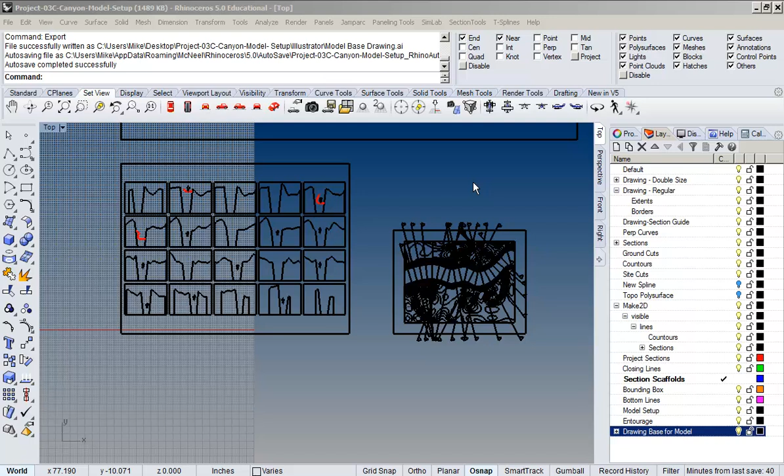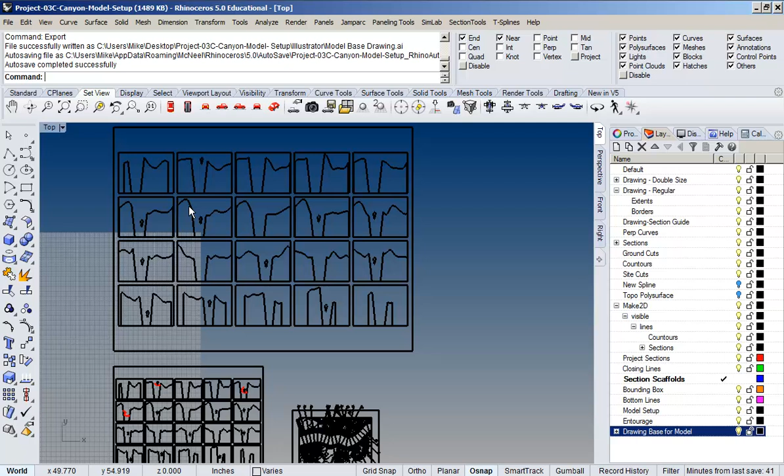It's more that we're trying to get set up to have these canyon slices ready, to have the base drawing ready, and to have what we're calling the section scaffolds ready, so we know where to put them and where to start building the model. The workflow itself is a lot of 2D information. We're not going to be going back into the 3D model as much as we are just going to set up for the model build. It's going to be a two-dimensional kind of workflow.

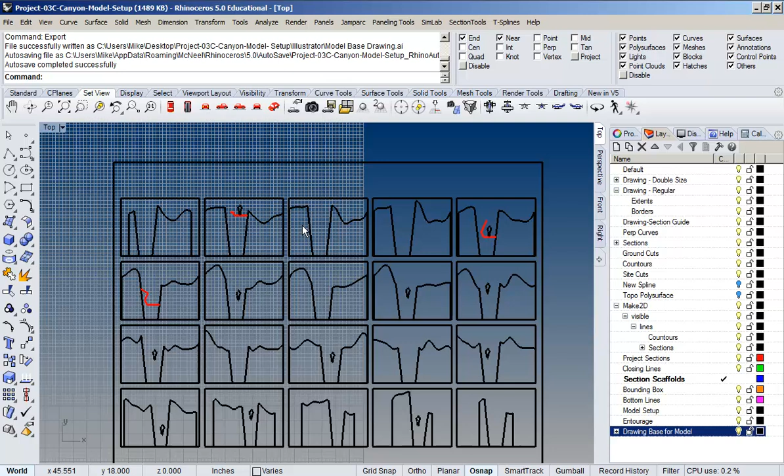Let's say that this is your drawing here, and I just did some mock-up with straight line polylines in terms of this is the thing that we have on the wall today, and that's the sections. I've only got 3 here, but let's say there's 11 of them all in here. What we want to do is scale these up to be the size of the full scale drawing that you guys had before.

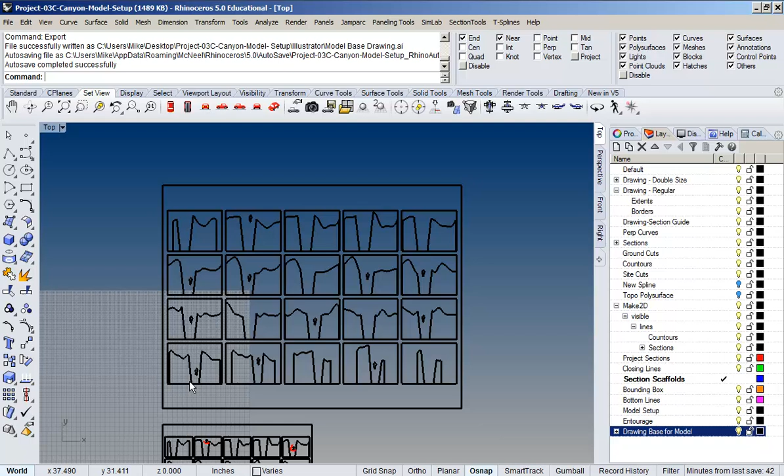So this is what we had, remember, back in project 2D, where we sliced up your model, and after slicing it up, we put it there, and then scaled it down to the 1/8 or smaller size, right? So we're going to take this and scale up our section. I think one of my guys moved over, but that's okay.

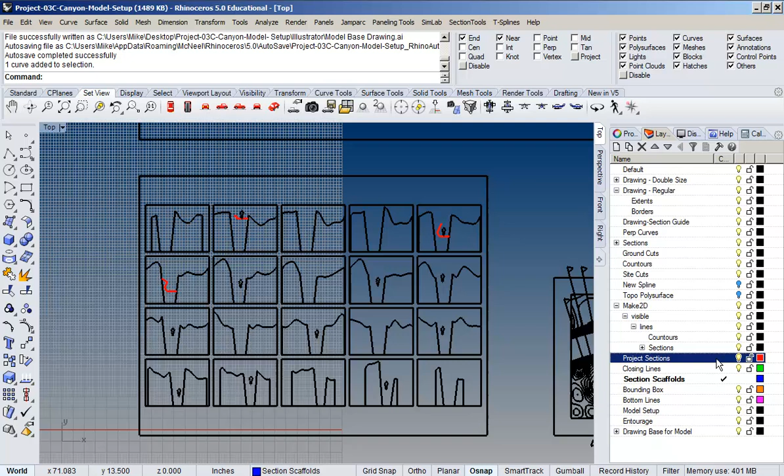I've got a layer that's just called sections, my project sections right there. So I'm going to select those and copy them.

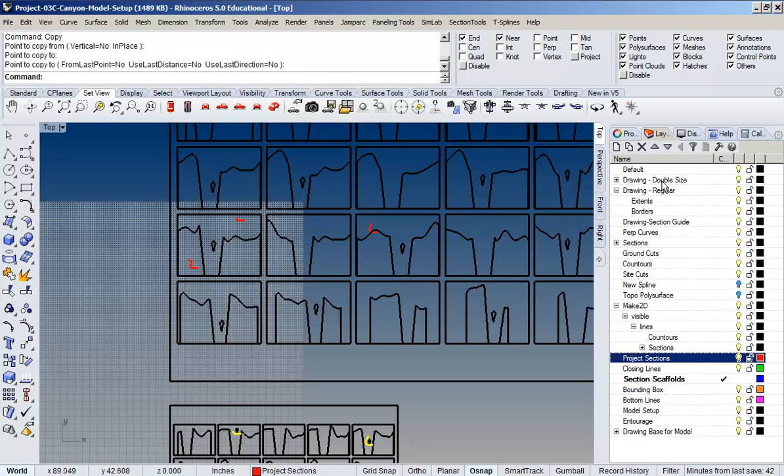You always want to use a consistent reference point. I think a good one's always the bottom left box that we've got here. And I'm going to copy them over to the double size thing. So you can see my layers here are from before, the drawing double size and the drawing regular size and stuff like that. I want to rescale these to fit into my bigger drawings.

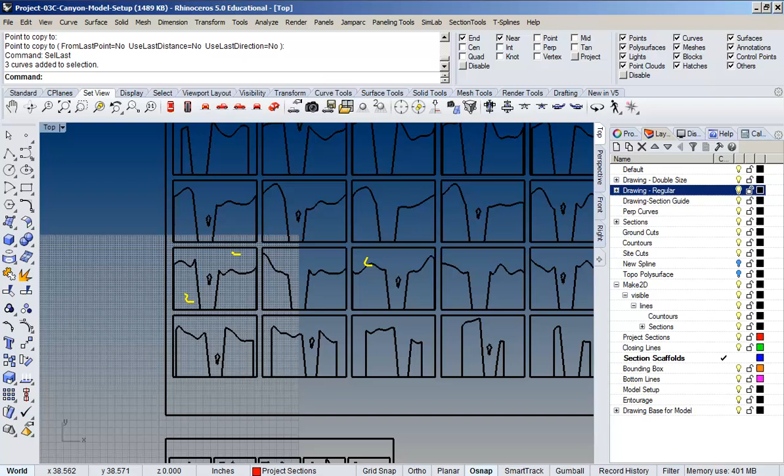So I'm going to do the select last command, which is SelLast, and that's going to pick those curves, and I'm going to scale them. My origin point is that same bottom left corner right there, and my scale factor is 2. That's just going to pop those up there.

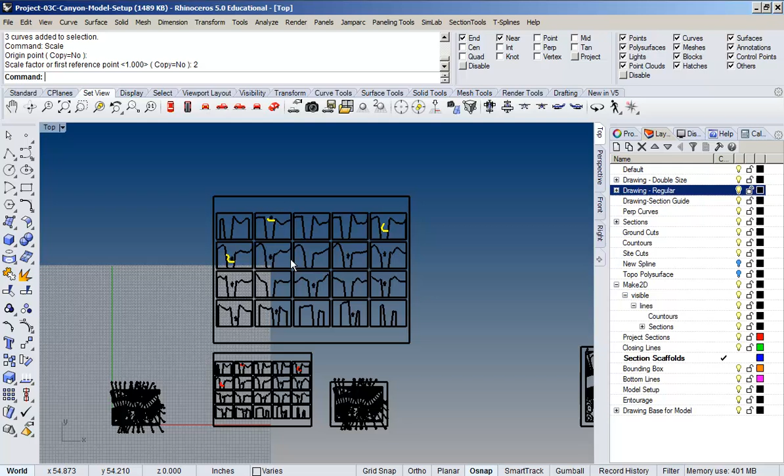The next thing that we're going to do, let me just make sure, is close up any holes that I've got. What I mean by that is we want to be able to treat this as our section scaffolds as one piece, and in order to do that, we want to come out of this with one closed line that we can use to set up.

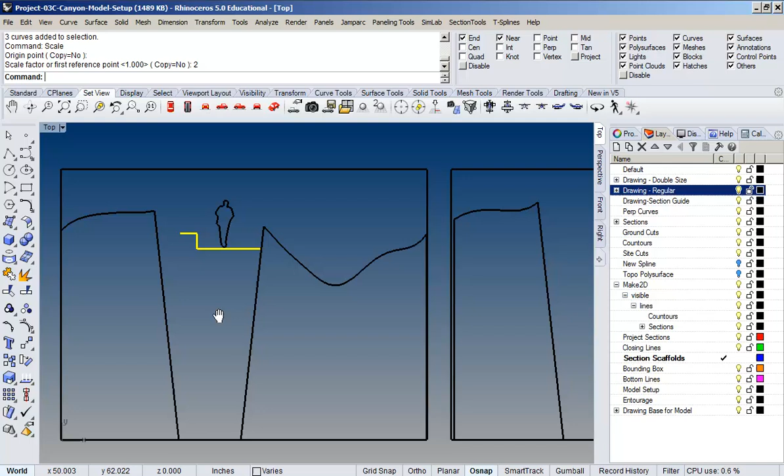So, for instance, on a project like this, I've got this cross section that's happening, and I want to be able to have a scaffold that fits to these 2 pieces of the canyon that I can line up to it. The best way to do that is to close it up.

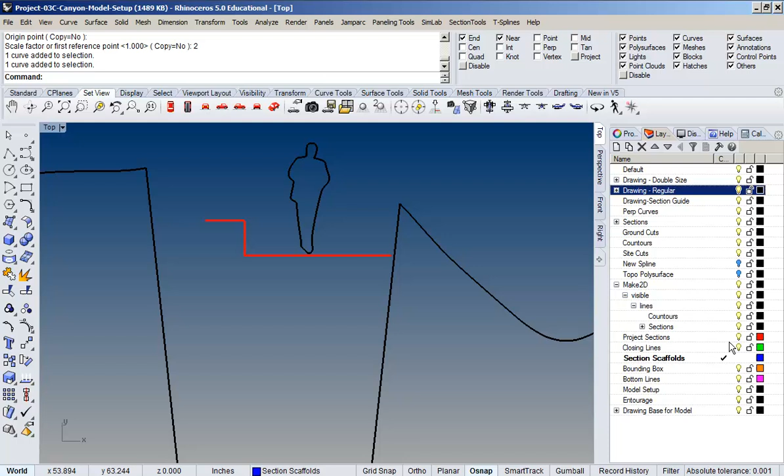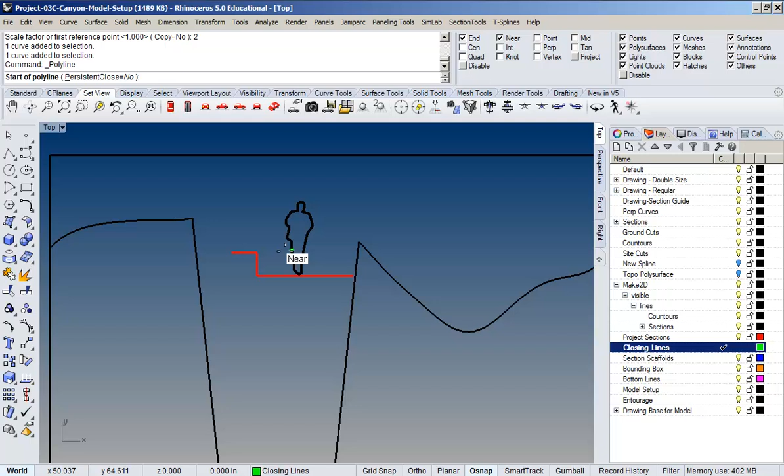So I've got a layer called closing lines, and this is going to be a matter of, for you, how do you want to work it, because we're trying to get as much access when we're model building from the top. Otherwise we would just cut the hole out of the middle of this thing. But if you're smart about it, you can give yourself a kind of setup to remind you what part of your model you want to work with.

So for instance, I've got 1, 2, 3, 4 points here in my model. If I want to be able to go down and work and connect to it, what I'm going to do is make my closing line come up a little bit and go over and come down like that.

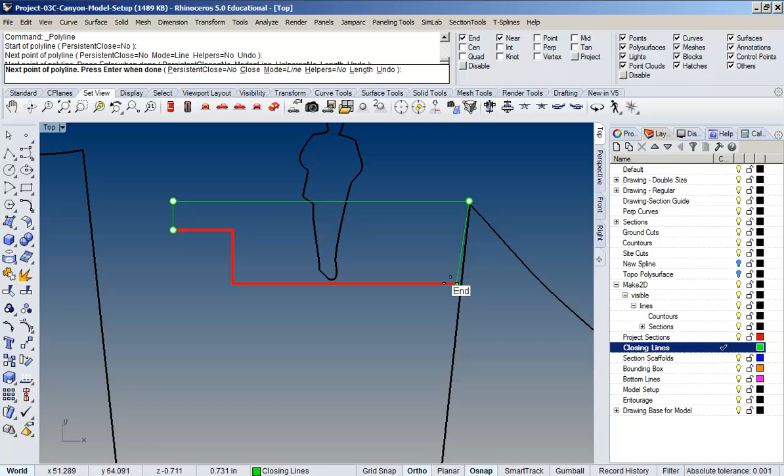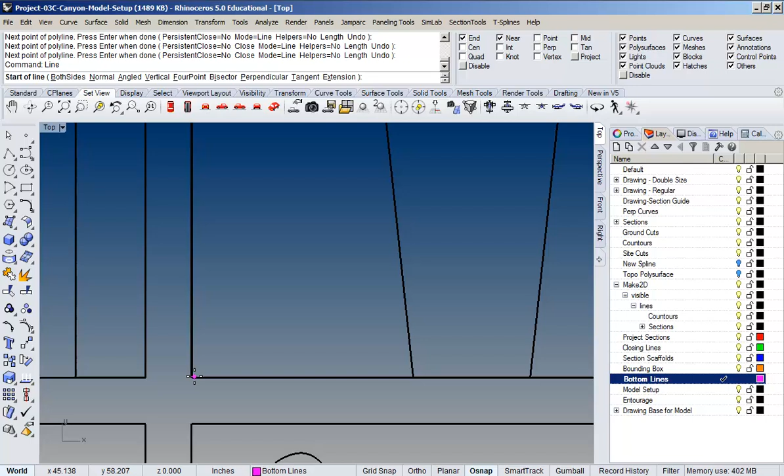Okay, and the next thing I'm going to do is I'm going to draw what's called a bottom line. We're calling it that, and that basically is reminding me in this particular moment how wide my canyon bottom is. What that's doing is it's letting me later on set this thing up to tack on to when it's glued straight up like this. It'll allow me to attach it right to it.

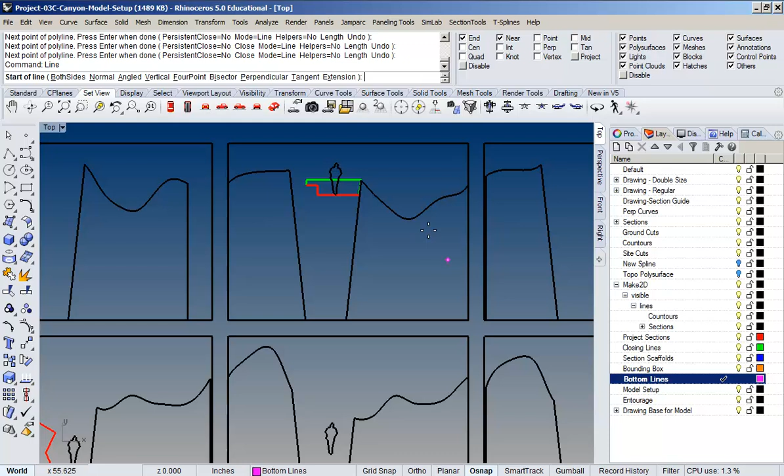I just want to let you know that it can be tricky right now with the way that my graphics look. It looks like they're in the same spot as my borders, and if you're not sure about that, you can take off your borders or something like that for a second and just make sure that you go to the ends here. So I'm going to draw one from here to there.

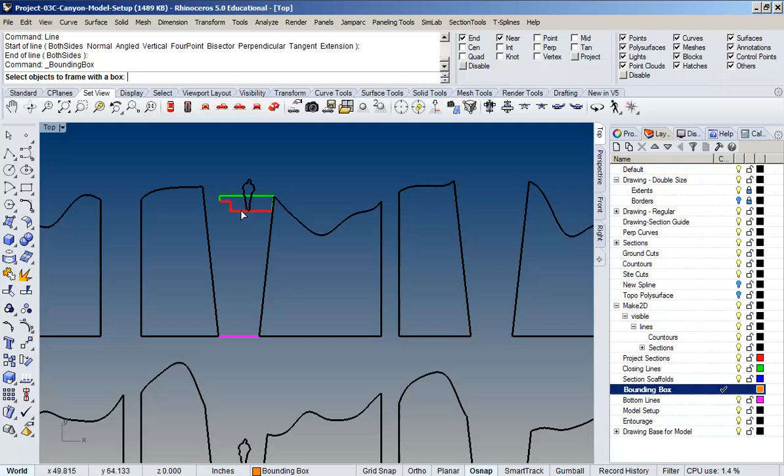And the reason why I'm doing that is it's going to set up a bounding box. This bounding box is going to go up as high as I need and as wide as I need. So that command is under Analyze, Bounding Box. It wants to know what objects we're going to frame with the box, and it's going to be my cross section, my closing curve, and my bottom curve, like that.

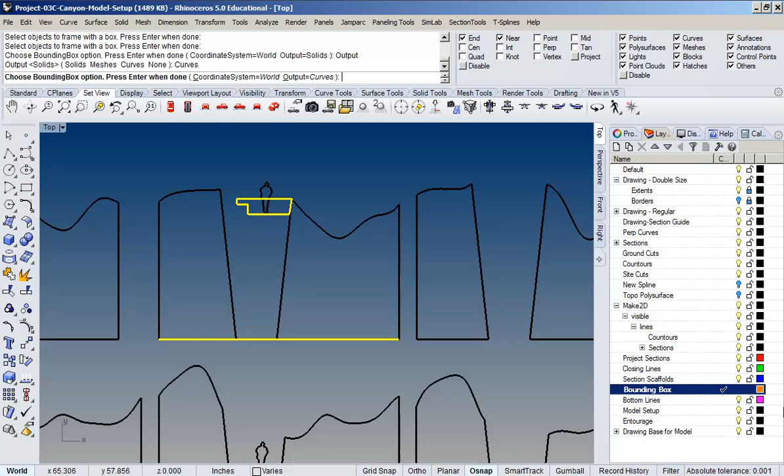I've got some options here for what happens with the bounding box. I want my outputs to be curves. It says right now solids, but I want it to be curves. And coordinate system world, that's good. So I have my current layer be bounding box, and I hit OK. And that's created this orange box around the whole thing.

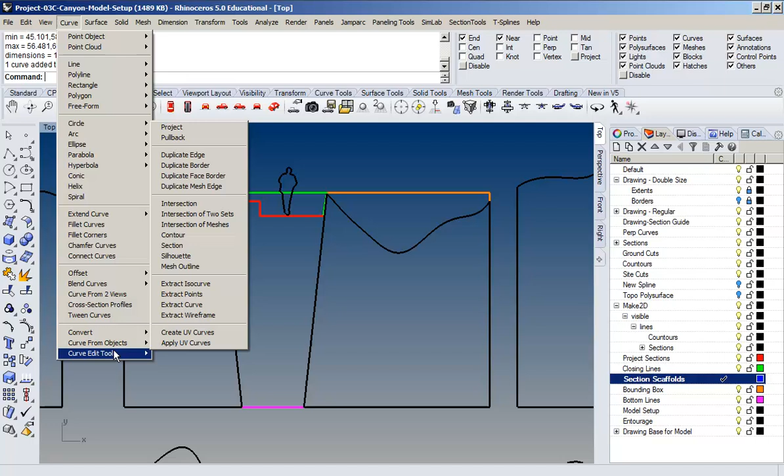So the last thing I'm going to do is I've got a layer called section scaffolds. And I'm going to use the curve boolean to get out of this collection of geometry just one closed curve that I can cut out by itself and use as the scaffold. Okay, so that's going to be under Curve Edit Tools, Curve Boolean. I'm going to say delete input none, combine regions equals yes.

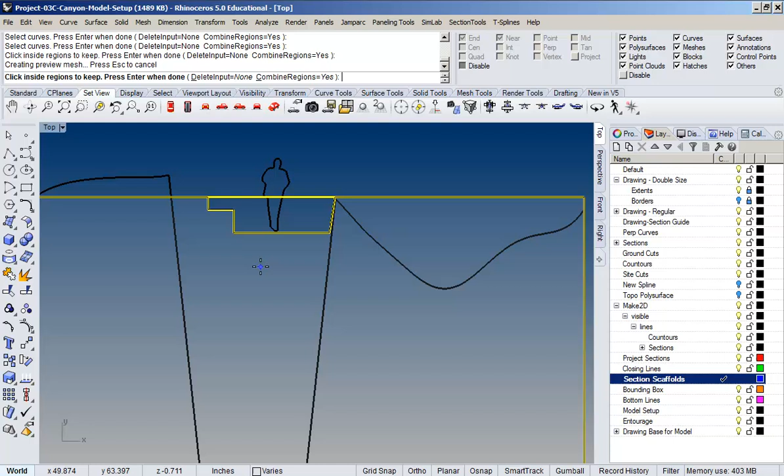I'm going to pick this curve, and my third curve. And it's going to tell me to click on regions to keep, and I'm going to click on here. That's what I want to keep, and that's going to be what I cut out. So I hit OK. And this new curve that I made is going to be on the section scaffolds layer, right? So that's the basic workflow for all of them.

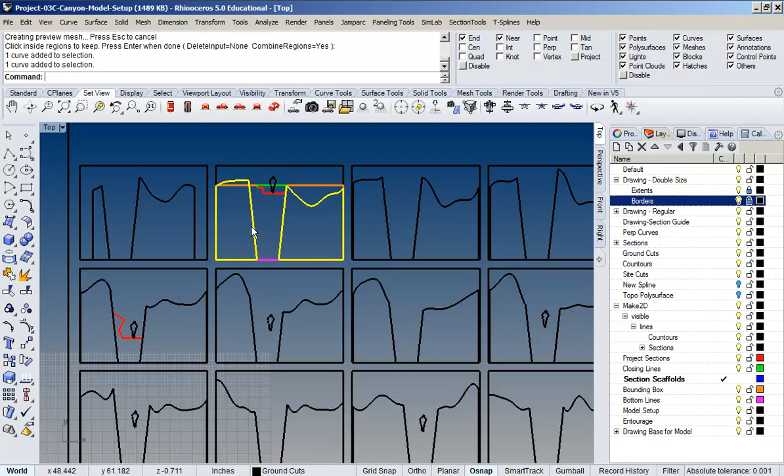And if you want, what you can do is just start to set aside, so you can get a gauge that if I do this 11 times, I'm going to have on my section scaffold layer 11 of these that need to get cut and set up, and I'm going to have 11 sets of that, and that's my new stuff that's going to be on the vertical. So what I would do is just start to maybe set that aside here.

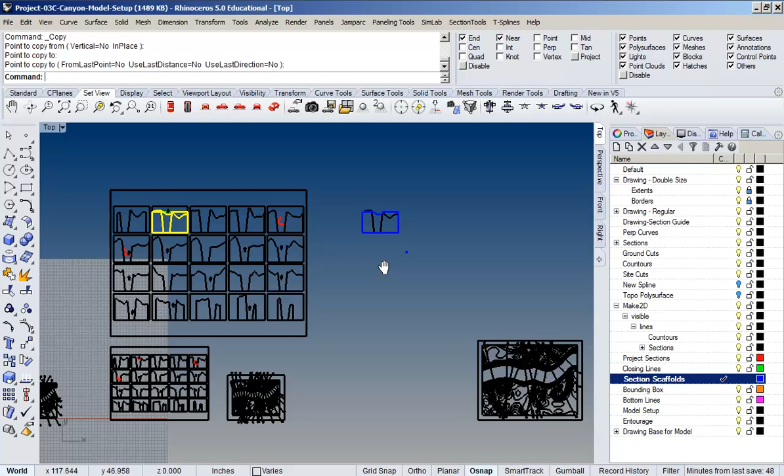If I select the objects on that layer and select these two, I can just start to copy those over to here. And then later on I can sort out how I want to nest it out and either set up a template and cut it by hand or laser cutter, however you cut it.

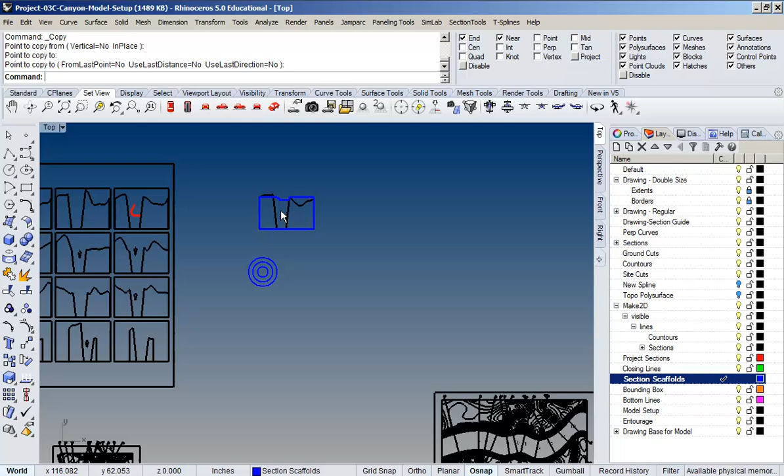The geometry on these is going to be relatively straightforward for your scaffolds because they're going to be straight lines, because your sections are straight lines. So you're not going to have to deal with any kind of curvature on it. So you can definitely save some time if you can't get to the laser cutter and just cut exactly those out. But that's the basic setup that we tried to draw over there as well.

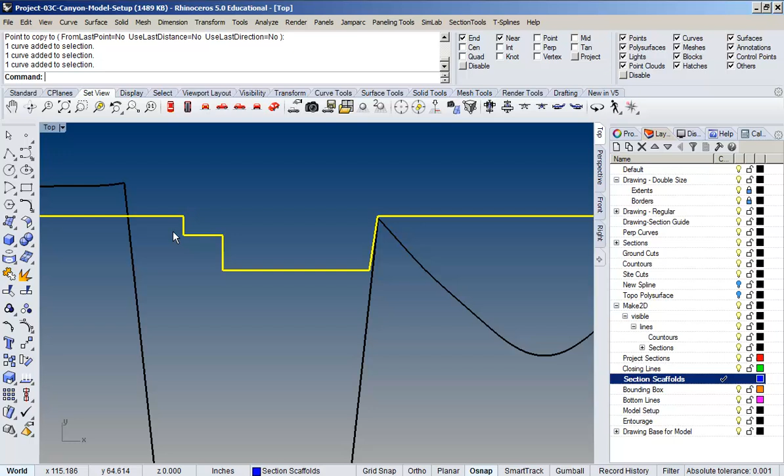So imagine these standing up, made out of cardboard, glued to the bottom of the base, and then just clipping this on as a setup. And then we start to have nice spots. As you can remember, my cross section over here looked like that. So these are my corners that I'm going to start to connect with the wireframe stuff. So I've got these nice spots that I can start my model with.

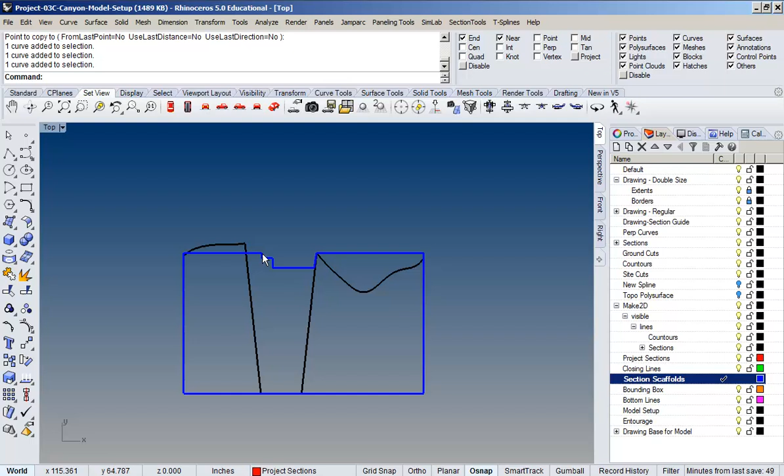Yep. Good. How would it work when you have not that section cut, but the other one that you drew that actually has a curve diagonally up? How would it work with something like that? It works the same way. This is actually the harder one because you kind of have to make something up. But on this one, you can just cap it off. So let's do this one.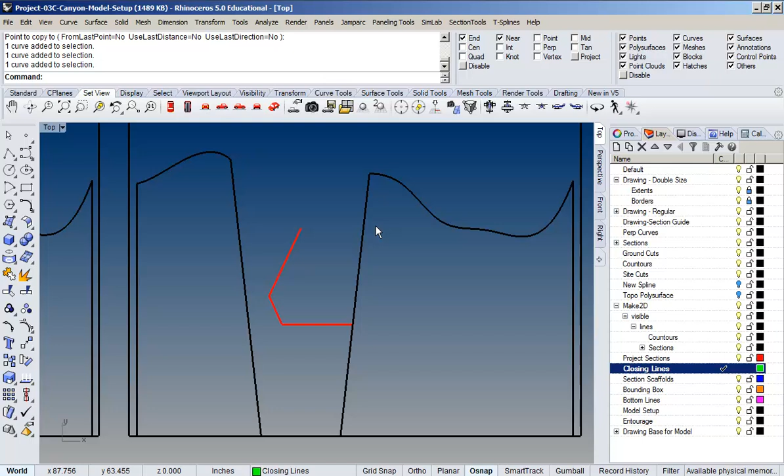Just do another polyline, right? And for me, I try to just stay perpendicular to things. So I'm going to come over here and then go down to there, and that's going to be that line that I add. You want to make sure that you're just basically joined up there. And what that's doing is it's setting up to leave it open for the curve boolean.

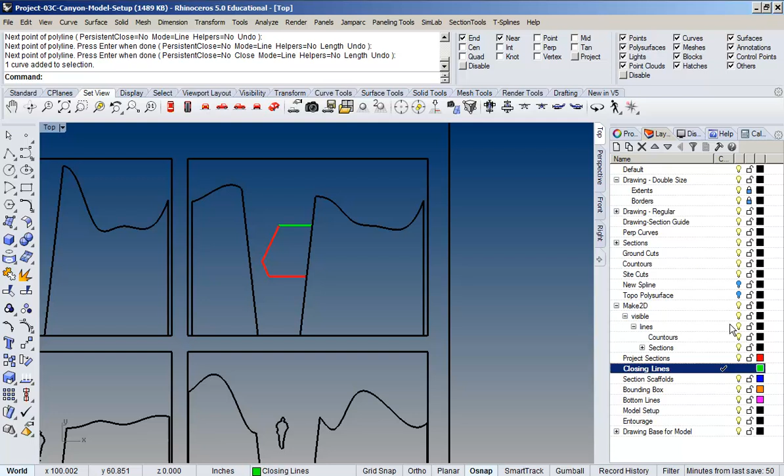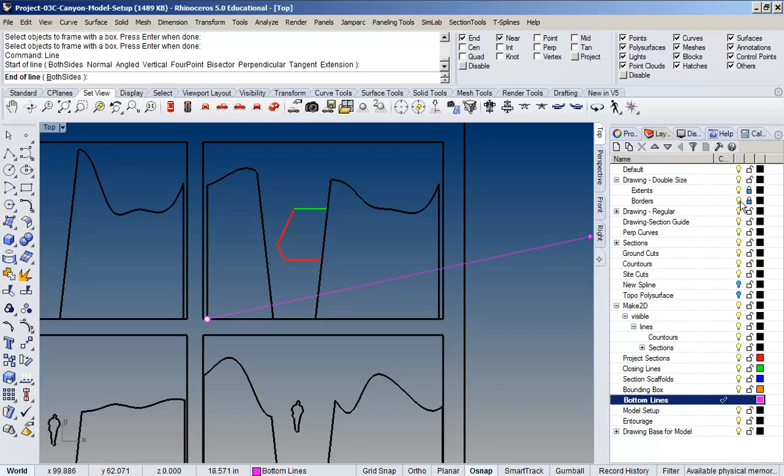Then I'm going to do my bounding box. Oops, wrong objects. I skipped a spot. I need to set up the bottom line. Because all of these slices are different widths, I have to every time just do a bottom line on there. And remember, if you turn off the borders, it'll make your life a little easier with those. And now I can do my bounding box with this guy, and this guy.

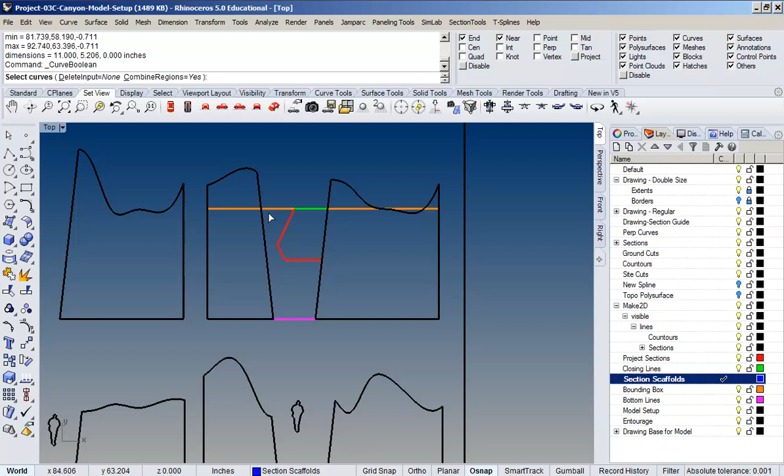This will be the active layer, curves. Okay. And then I do the curve boolean on the layer for the section scaffolds. And those options will stay the same. So it's just going to be this one, and this one. And that's going to be my new scaffold that comes out of it. I'll just move it over here so you can see it for a second.

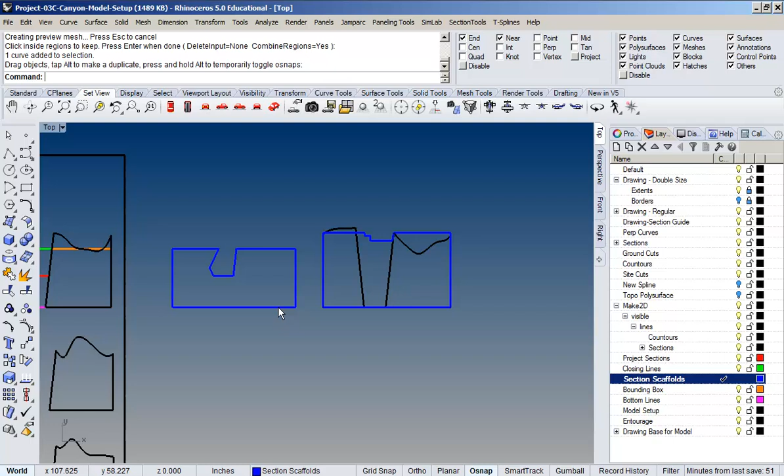Yeah. So again, I would keep it as simple as possible. I think the one thing that you guys just want to keep an eye out for is that it's meant to make your life easier, so kind of keep that in mind. This was my section, and I just want access to it. So I can create any kind of scaffold I want. We're kind of recommending the lowest and simplest because it lets you get your hands in there and it still gives you access to the corner points.

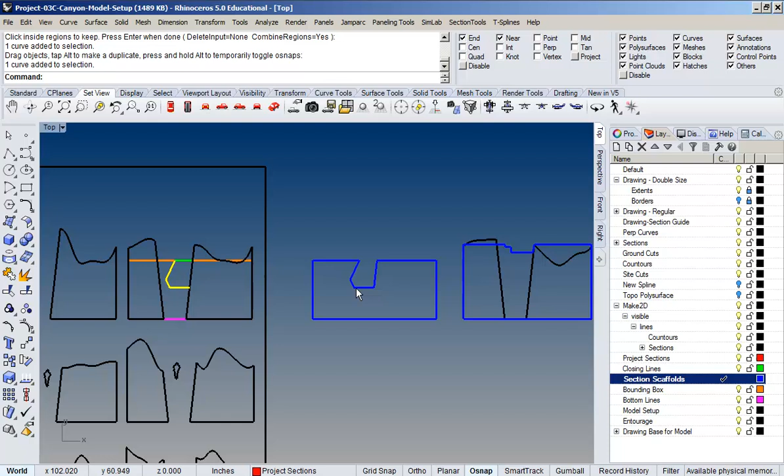But if you have a better idea in terms of, well, I want to add an extra ridge here, or I want to build it higher, or whatever the case is, that's on a case-by-case basis. Just keep in mind that the lower these things are, the easier you'll be able to access the model and things like that. And you'll be setting up less boundaries along the way. But yeah, it's a good question.

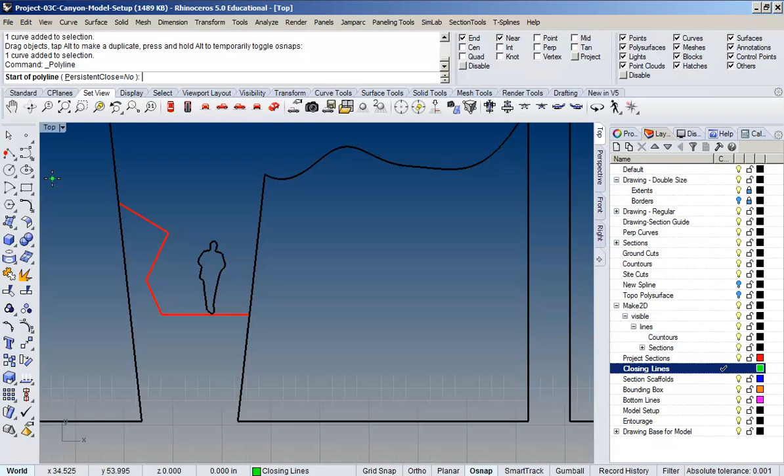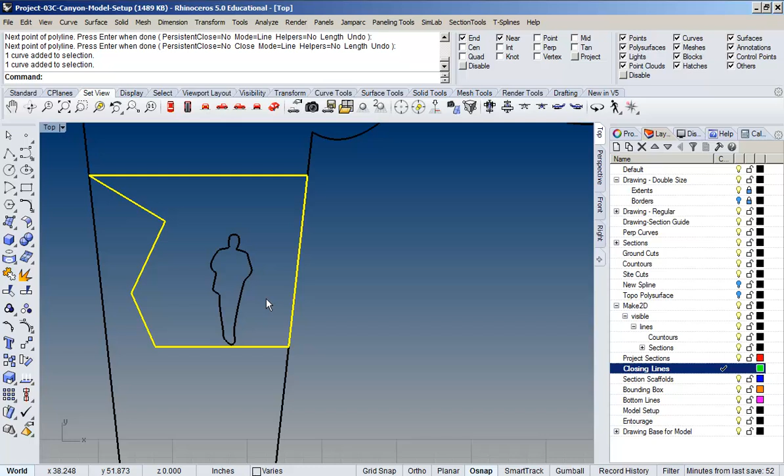For instance, this one, I would just do a line straight across. What happens down here is also kind of important too. So I'm going to have my shift on, and I'll let that intersect happen perpendicular and then come down. You just want to make sure that these two curves touch each other on the ends, because that way the curve Boolean will work. It'll treat it like a closed curve.

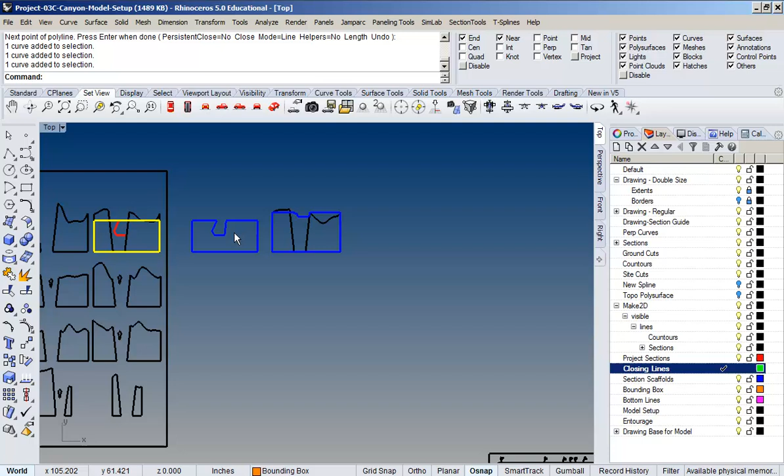The bounding box is just a shortcut to get us to the smallest possible one. You could also just draw a rectangle that size once that's there. The bounding box always guarantees the smallest box on that. Yeah. So that's the setup for all the vertical ones. That's like half of the story right there on the setup, and it's kind of the most work really. And you should already have these lines, so it's not too bad.

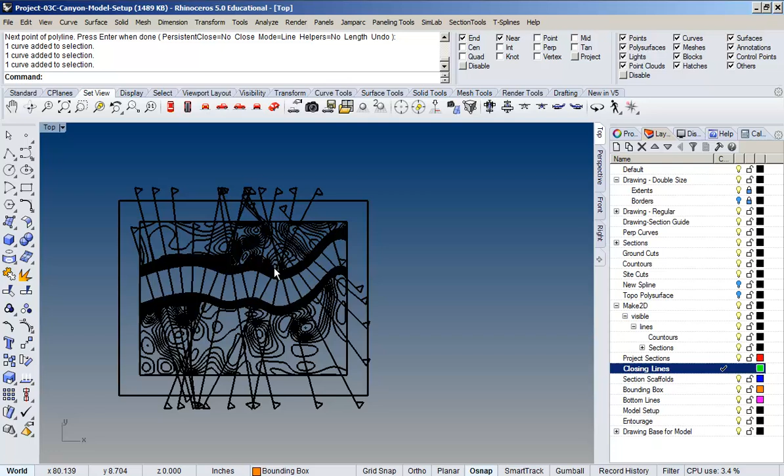The other one is just to set up the base. So this is kind of an unfinished version, but geometrically, this is what we had with Make 2D, right? It's this thing that's the size of your physical quarter scale model. So we just need to bring it up to something that looks like that. It's going to print out like this, right? And you're gonna spray mount it flush on the MDF, because that way we can guarantee no matter how long your slices happen into here, we'll still know what sections you are.

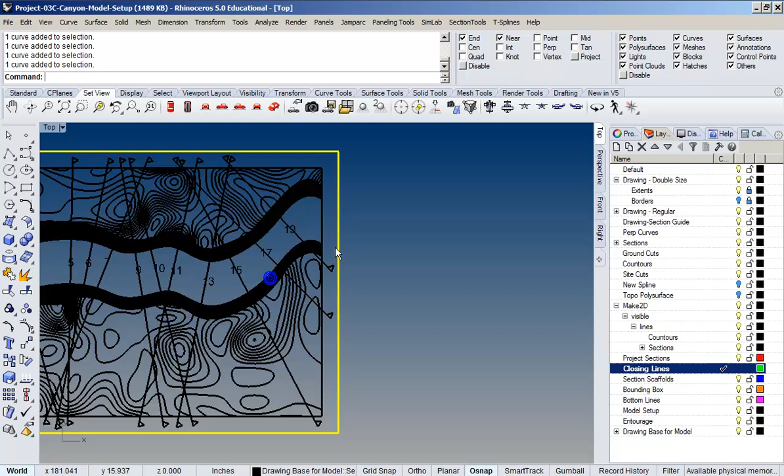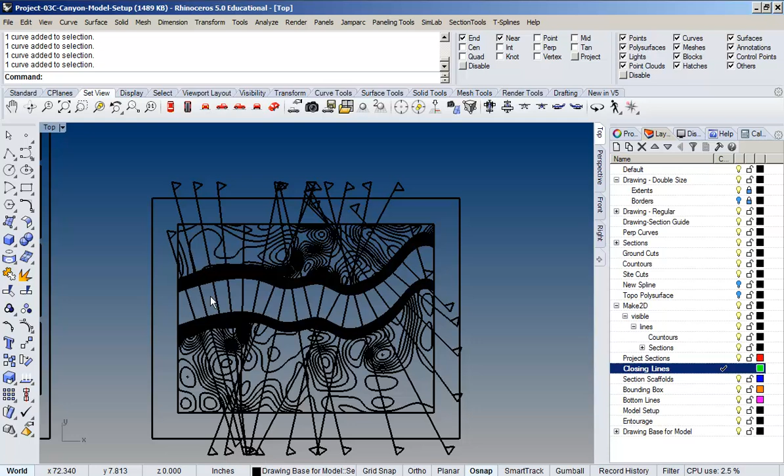So with that one, the first thing that you want to do is you want to reduce it down to the 11 sections that you need, right? So this is my Make 2D version that I then brought into Illustrator, but you can start to bring this down and take away the ones you don't need, and I've got that kind of done.

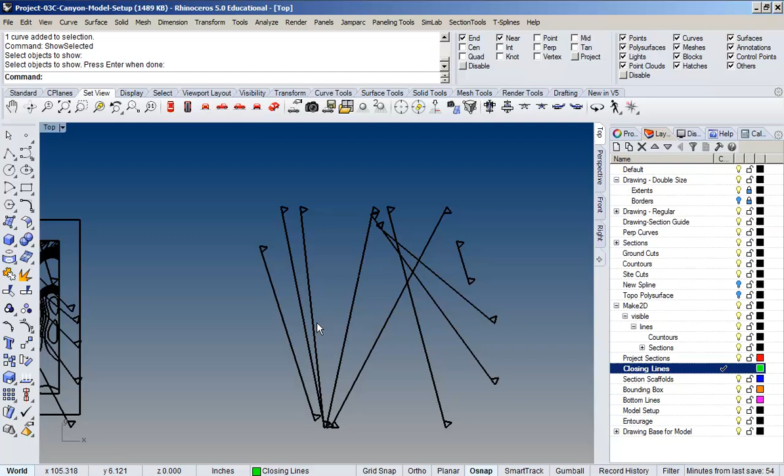Here with these kinds of sections, it kind of lets you know these are the ones that I picked going out. They're corresponding to whatever ones that you drew. So you can already see that this drawing is going to be a little bit simpler than that. So that's scaled out without it.

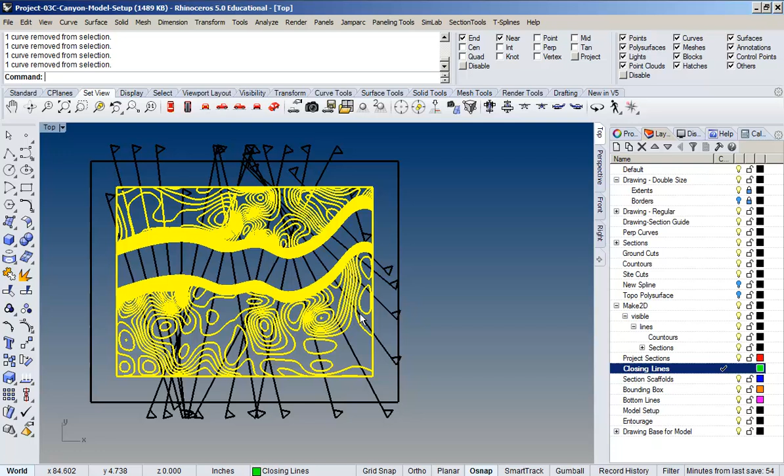What I'll do is I'll just take these curves, and I'm going to scale them out without the border, because we're going to do a new border for it, this big outside border. So I'm just going to make a copy of this so you can see the workflow.

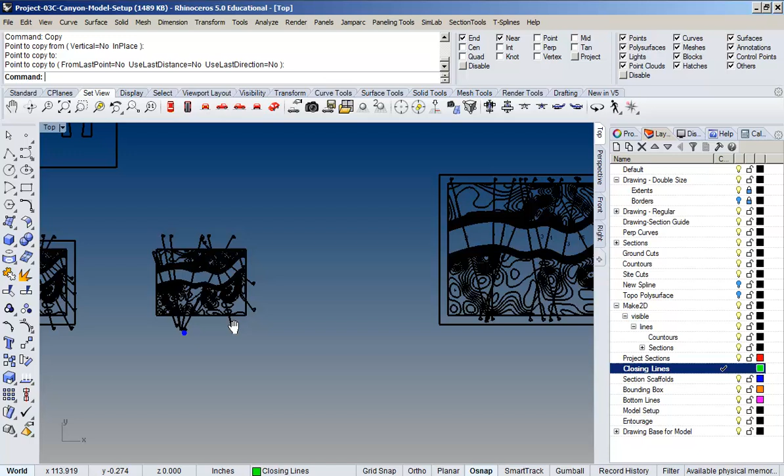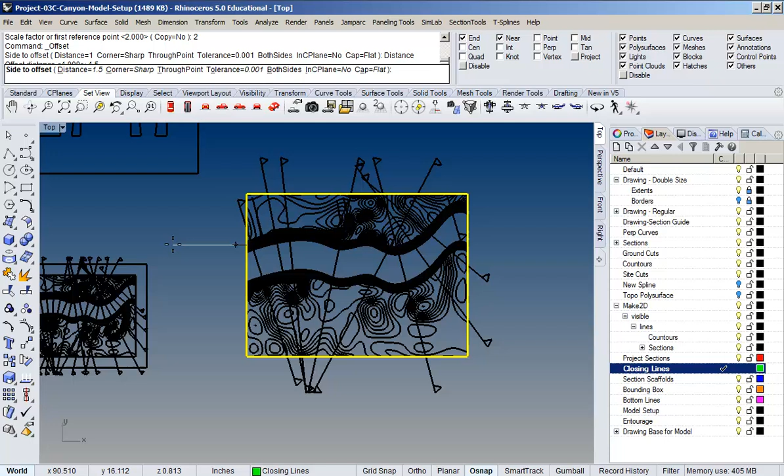So this is going to scale up by 2, factor of 2, like that. And we'll do a new border that's 1.5 inches away. So I'm going to use curve offset. My distance is going to change to be 1.5 inches. So I'm going to do 1.5 and go out with it. That should be enough for our flags to fit in here.

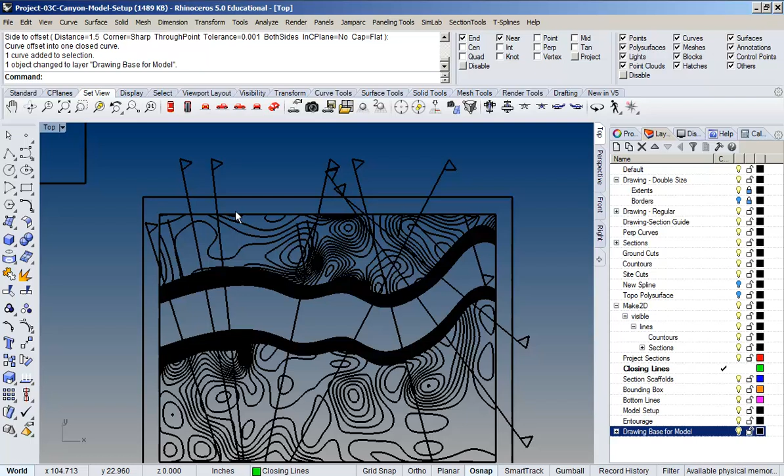But unfortunately, because we scaled up the flags themselves, and that's going to be on that layer, the flags got bigger too. But we wanted them to, it had to scale up so they'd be in the right spot for our 11 sections. So we do want to just scale these down and fit them into the border like here. And that's basically all I did, and it's pretty quick. It's just rescaling and moving it.

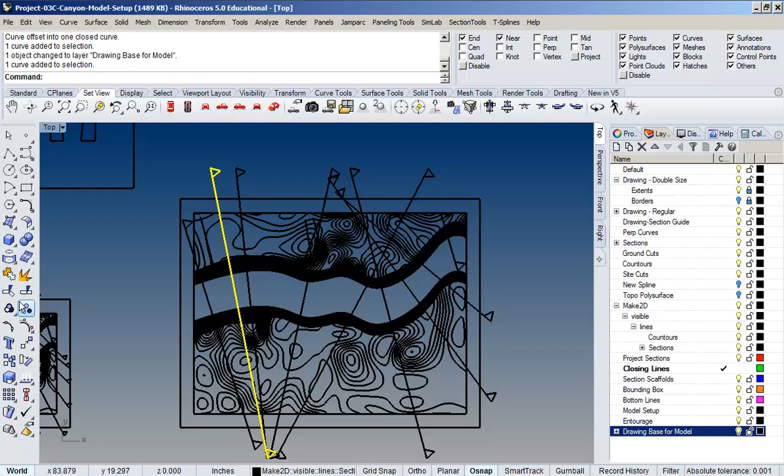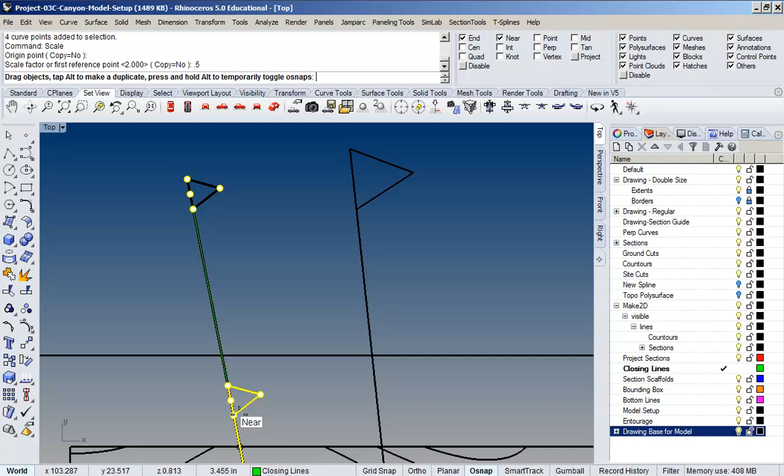Again, I do the control points, and if I want to rescale the flag, I just grab the control points and use the scale command. Use this little corner as the origin point and type 0.5. It'll just rescale it. And while I'm at it, I can move it in. So if I've got near snap on, I can just grab it and snap it to be in there.

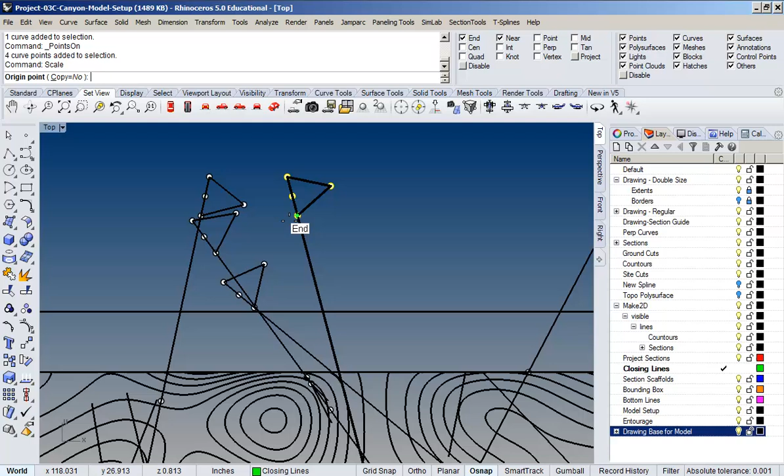The quick way to do it is to turn your control points all on at the same time. That way you can just go by and run the scale command over and over again as the last command. And it remembers that the last time you scaled something, it was by half. So you don't have to re-enter it a bunch of times.

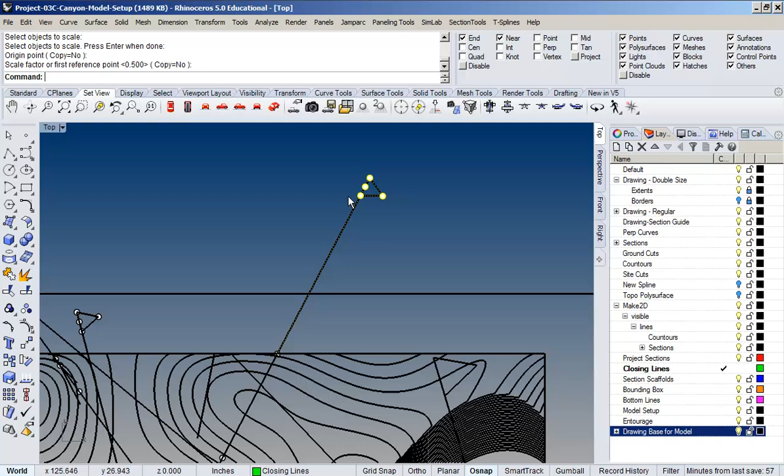And the move is not technically a command, it's a drag. So when I hit space again, it has to scale again. So it'll cut it out pretty quick. And because I've already turned on my control points, I don't have to keep running that control point command anymore. So that can make this pretty quick. So that's what I did. I brought it over there.

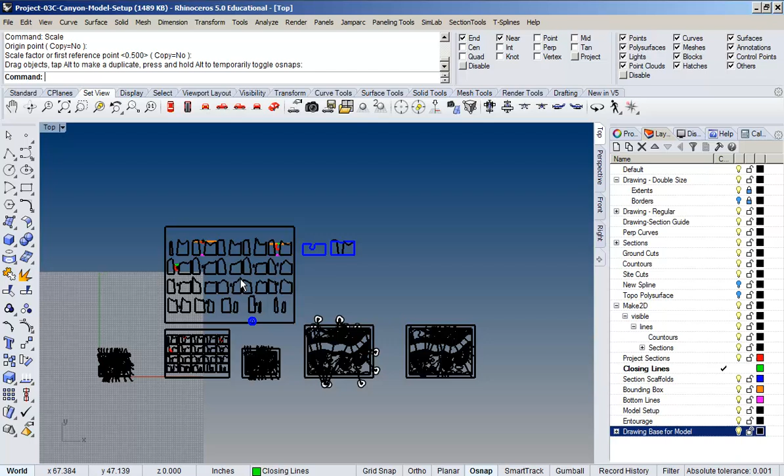These were numbers just for me to remember what sections I was working on at the time when I went and picked them out and compared them to this up here. So this is what 11 would look like. And basically, this is ready to go out into Illustrator.

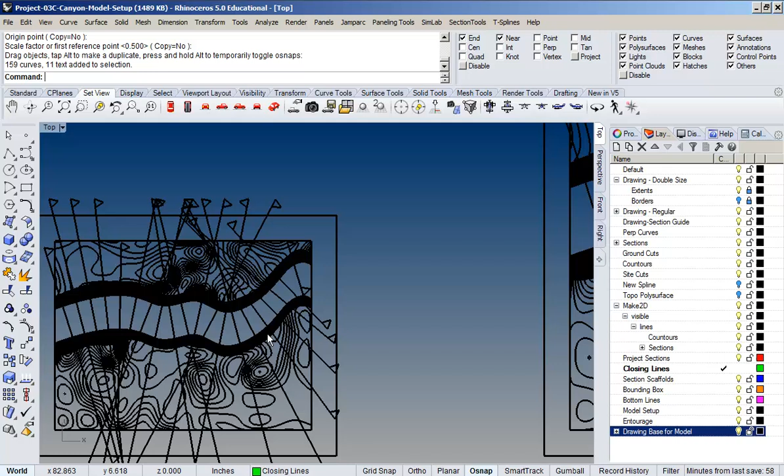And you're going to use the same line weights and numbers as before for your smaller version of it. Whatever those line weight values are, you've got them already written up and set up. I think it's like 0.5 for the topo lines or something like that in black. And the numbers themselves, you can just copy over and put on your flags here. After you do that line work in Illustrator, it's going to be ready and good to go.

Just make sure when you print it that no scaling happens or anything like that, because you'll already have a piece of MDF it has to fit to. But you guys are pretty good with that already. Any questions?

Yep. More like Rhino specific, but go ahead. Do we put the flags inside the drawing, or is it fine to put it on the border? We're putting them on the border like this, because that way we'll be able to see them a little bit easier. You're going to have a lot of stuff going on in your model. You're going to have stuff glued up, and you might have to add some supports, and it'll be a little bit easier for people looking at your model to see the section cut along the way.

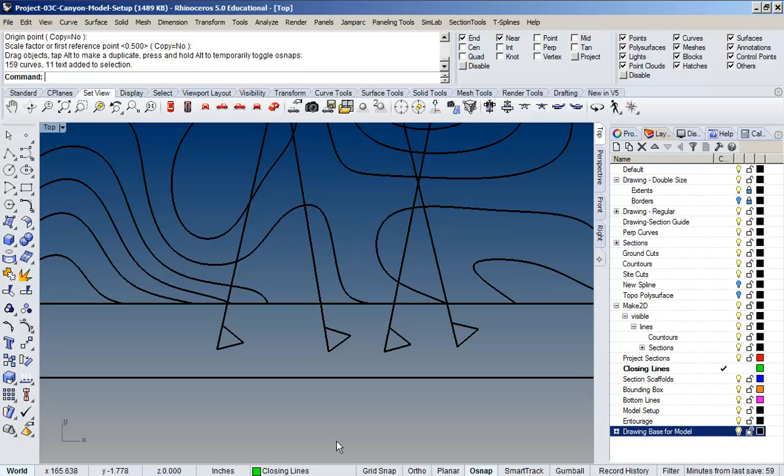So I would just try to get it basically in the middle there. And obviously when you get into these kinds of situations, you've got to use your best judgment to nudge it around a little bit. So the cardboard's going to line up with the line pretty much? Say that again, sorry. Cardboard's going to line up? Yeah, depending on how your thing got cropped, you're going to have a piece of cardboard sitting on it around right here.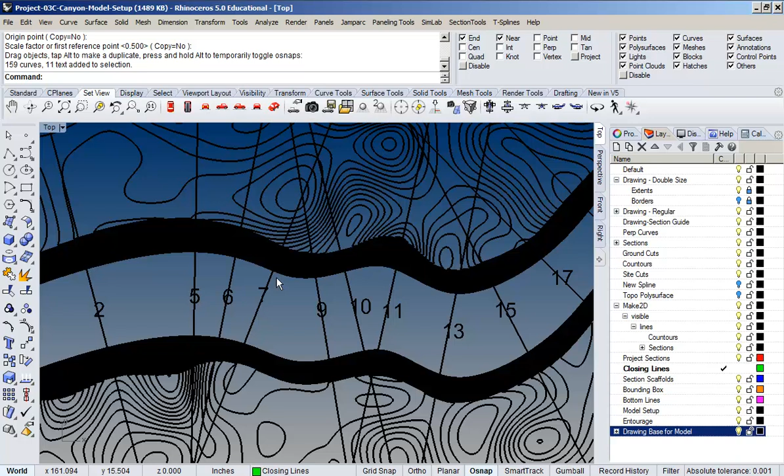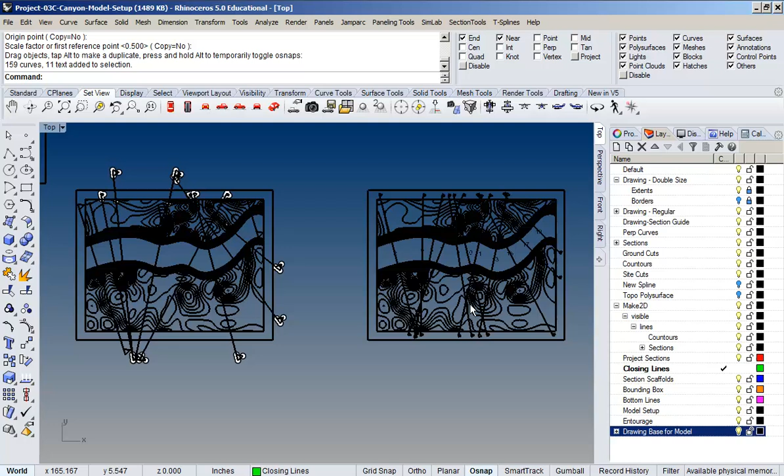Are we centering the cardboard, or are we sticking one side onto that line? You're centering the cardboard, so your registration is going to be the bottom of the valley here, where you've got those two pieces. These are the 2 points that you can use to center it. That's why we're not doing the full ones, because it's going to create lots more intersections, and you'd basically have less ability to reach into your model. So that's why we're using these cropped sections versus the full sections.

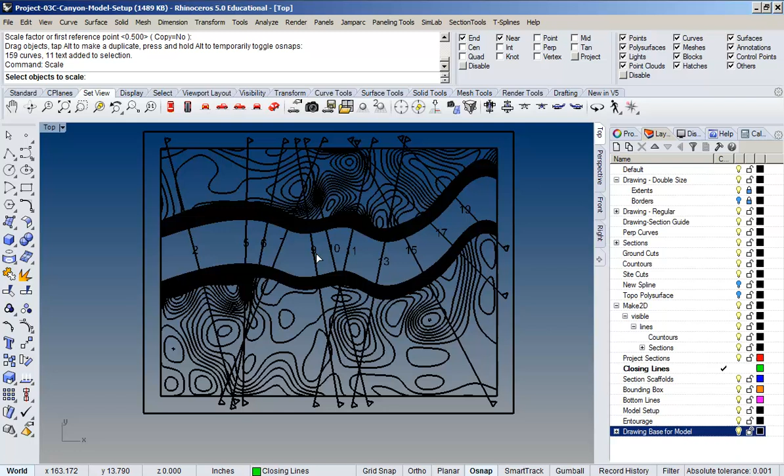So your registration, the way you know where to place these things, is by having this bottom topo line up with it. Any other questions? These are good. Since some of our lines are going to be crossing over each other, do we have to cut our cardboard accordingly? So if we have one section doing this, and they're hitting each other, do we just slice off that one section, or do we have to have

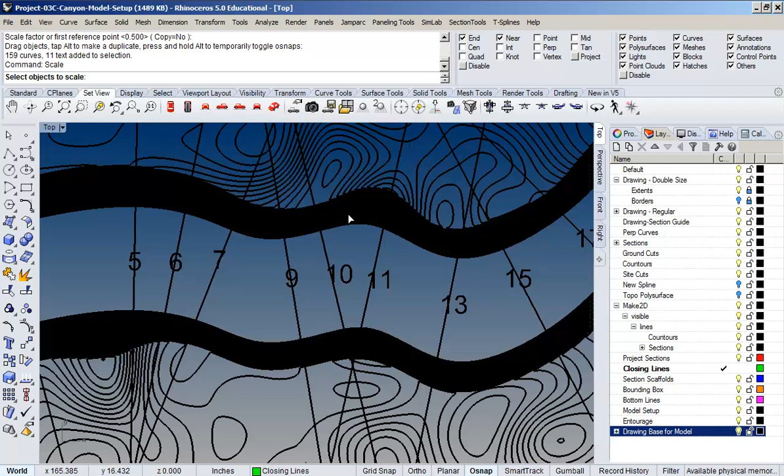I'd say it's a case-by-case basis on that. You want to look and see how much you need to cut off and how much it affects the model. If it's only a small slice, you might not have to do it. You always want to check with the instructor on it. But in terms of the graphic, there's so much of a range, there's no great answer for that. Some of my little ones aren't going to be much cardboard at all, and that's a different case than the larger ones. So it's going to be case by case.

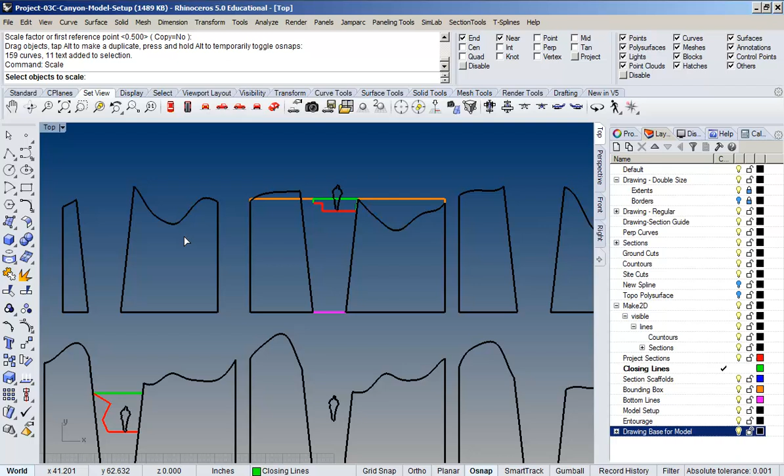But the good thing is, it's structurally nice to have these intersections to cut them and then reattach them, because now you're getting something with a better base than leaving it off, right? You're going to have more connection points. So it's going to start to lattice up on you, and it's going to have stronger connections. It's going to want to stay standing more.

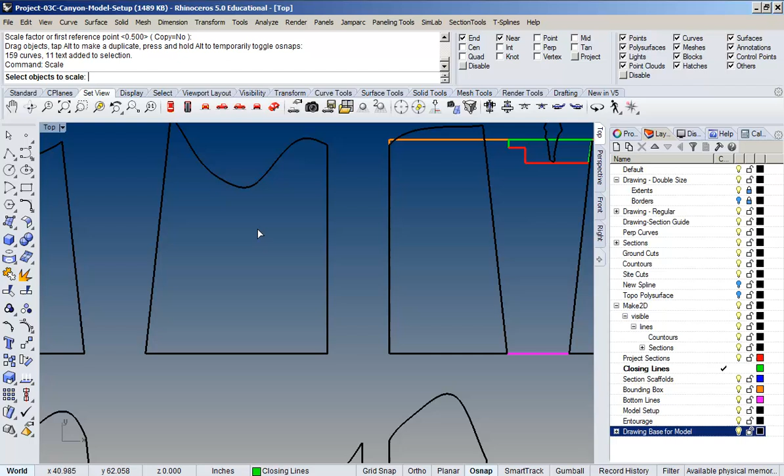Going back to case by case: on mine, since it's a complete S, I have sections that end up having 3 hills within the exact same section cut. So what I end up having to do is duplicate and cut it to fixate through the whole topo. Shorten the section. Mm-hmm.

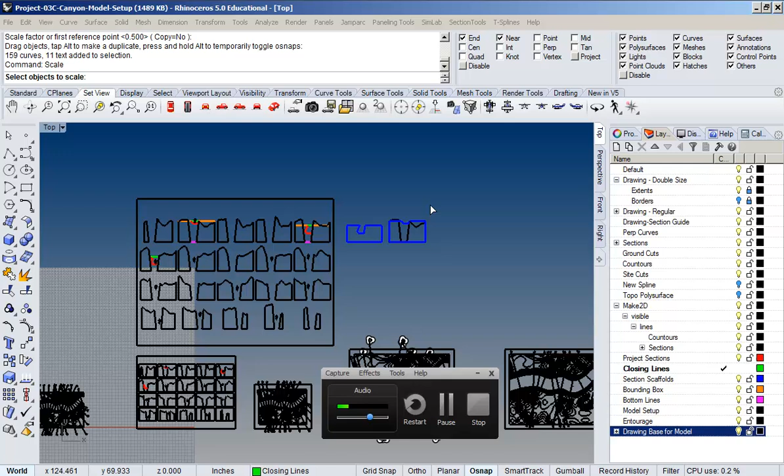This talk is about individual cases, but in terms of the recording, are there any Rhino questions before we stop it, and then we'll talk about the model after that? The Rhino stuff's okay? Okay, let me stop that so we can talk.